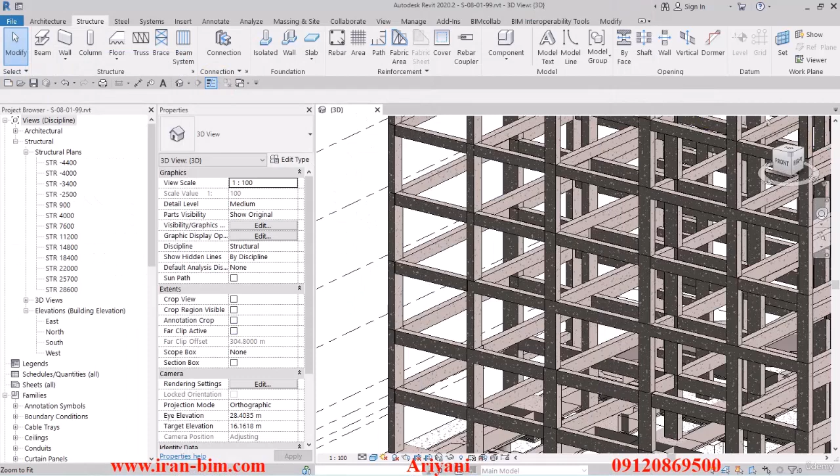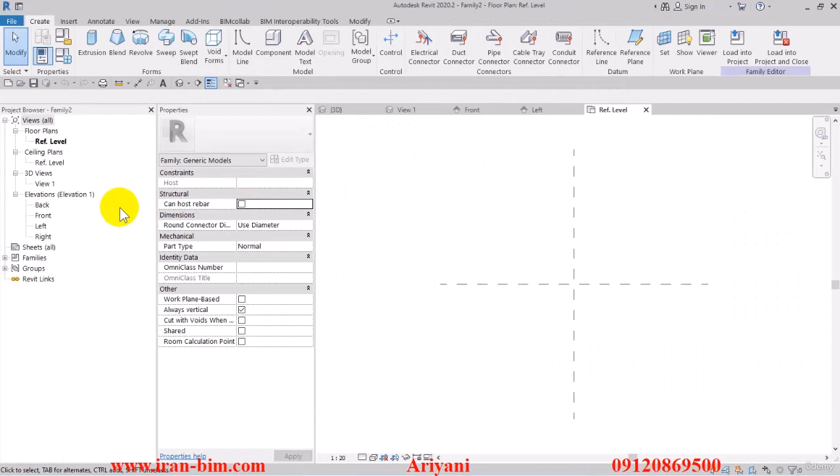Looking at the plans, I've created this profile here, and I'm going to copy it. Then in the Revit file, I'll select a new family, and load up the metric generic model from here. Then we go to the front view.

I'll type UN, and from this menu I'll put the units on meters. Let's have this on 1 decimal place, or you know what, 2 decimal places, and then OK.

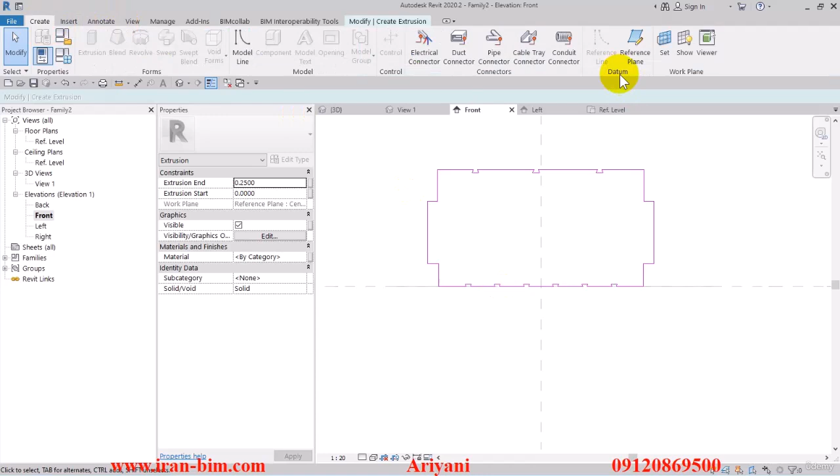After that, select the extrusion and click on import CAD and open this up. Then I'll select the reference plane tool and draw a reference plane here, then another one here, and the last one for its height.

Now I'll select these and equalize them, and this one as well. Then I'll select this up here and name it W. After that, select this one down here and name this one H for height.

Then let's go to the family types, change the H to 0.25 and W to 0.5. Then select the align tool.

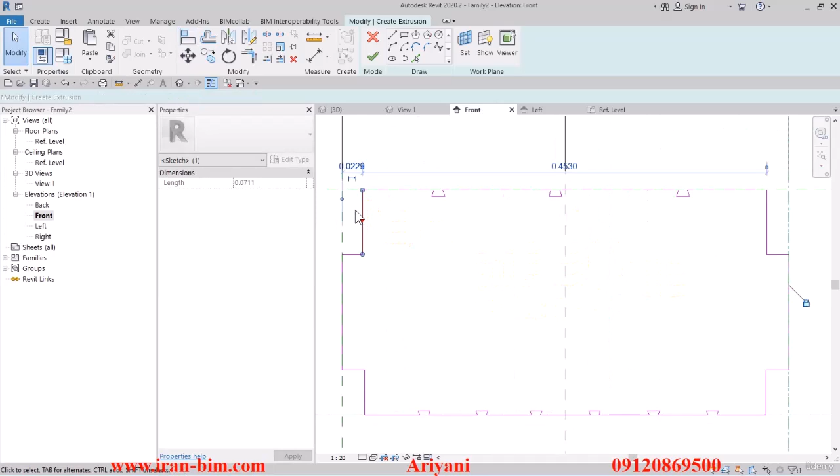I'll lock this with here, then equalize the two sides of this. So Control C here, and then we go over here and paste. Then select the line and lock this with this one.

Let's go back to the plan and finish this up. I'll select the reference plane and draw one here, and another one down here. After that, let's draw 2 vertical ones here.

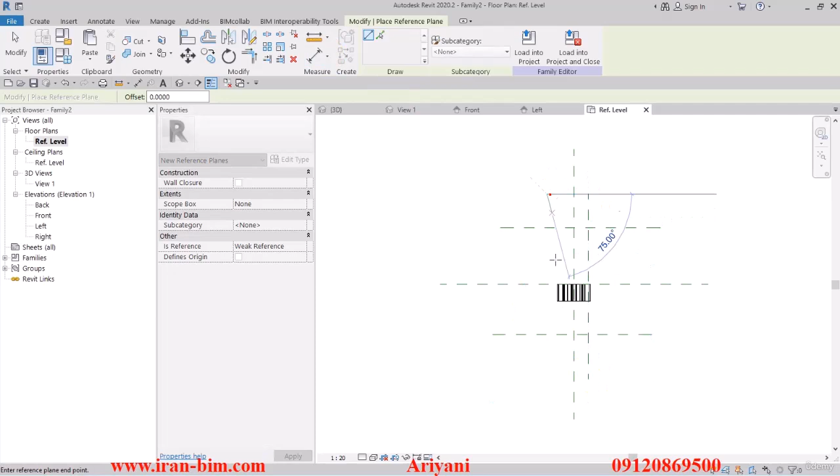After that, let's draw this on the side and equalize it. So this one's going to be our length, and this one is the W. I'm just drawing these in case we need to align them later on in the project.

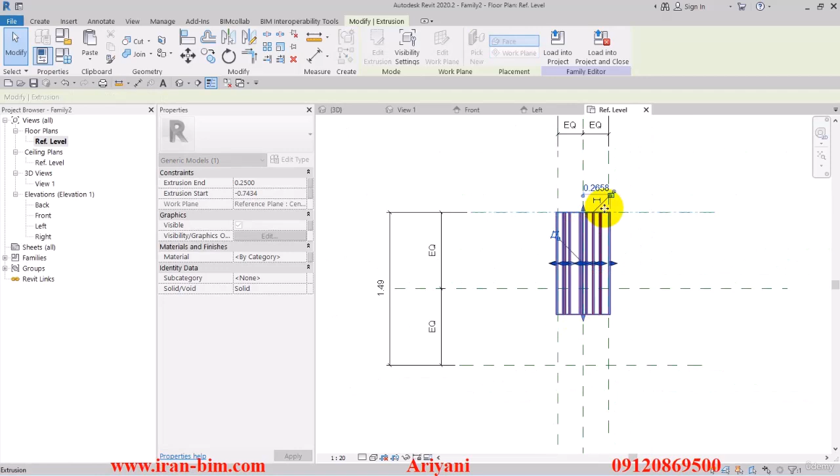After I'm done adjusting the W, I'll go here and select this, pull it up to here, then lock it, and then this, and lock it here as well. So we'll name this one length.

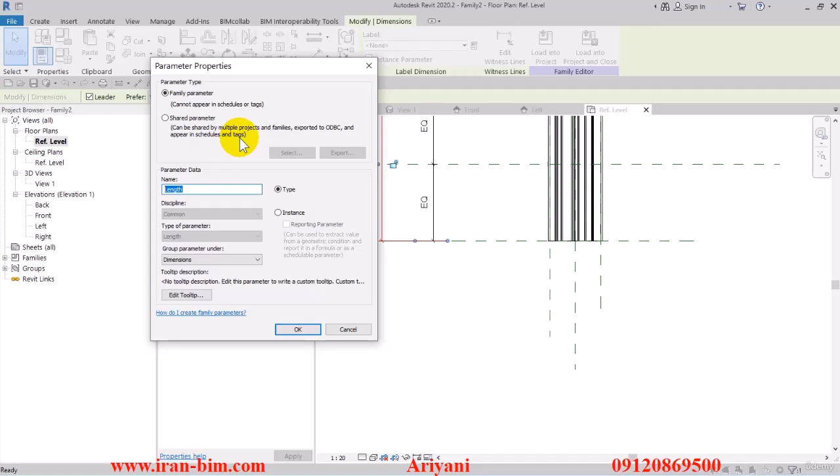The standard length that we're supposed to have here is 2 meters. But sometimes in the project, in order to smooth things out, we may need to adjust this one as well. So what we can do here is put this under the shared parameter, and later on, if you want to add in, let's say 20 centimeters, we won't have to split it up separately. We can just change this to 2.2.

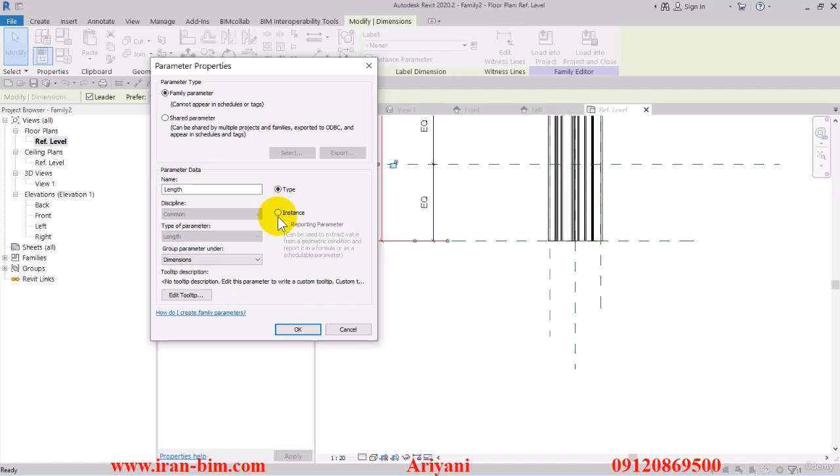Later on, we can divide the total length of these by 2 meters and get the number that we want. Or if you want to work the project patiently, you can just put this on the family parameter and edit it as you go on. This is all based on your preference.

So just put this on the instance and OK, and then put the length on 2 meters here. Then I'll select this here and give it a material parameter.

Let's see what we should name this one. We'll just go with polystyrene for now. Alright, and then OK, and OK here as well.

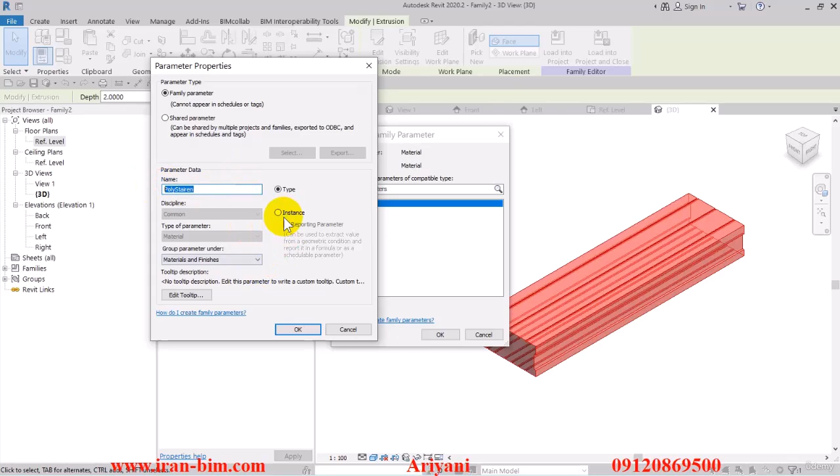Then I'll go to the family types and open up the material by category. And here in the browser, I'll look for polystyrene. Let me just edit it so I can see what I actually can find.

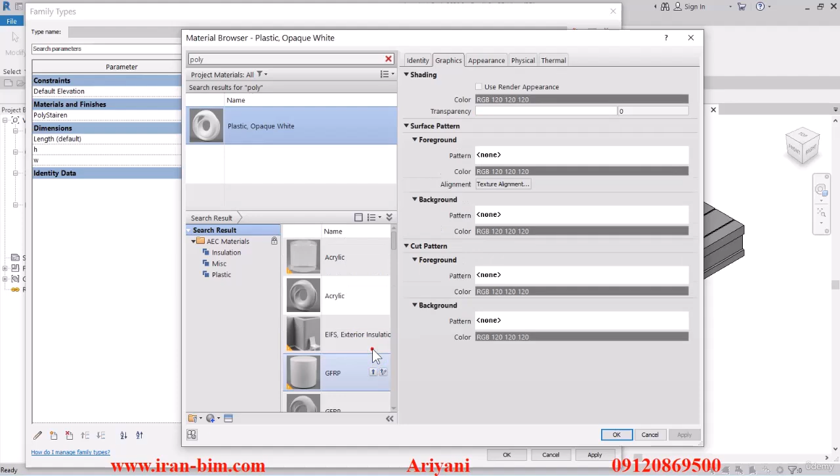From the menu, I'll look through these, select this one and add it up. Then check this box and apply and OK. And apply again. So now I'll save the file.

Back here, open up the families folder, and just name it polystyrene. Then put the maximum backups on 1 and save it.

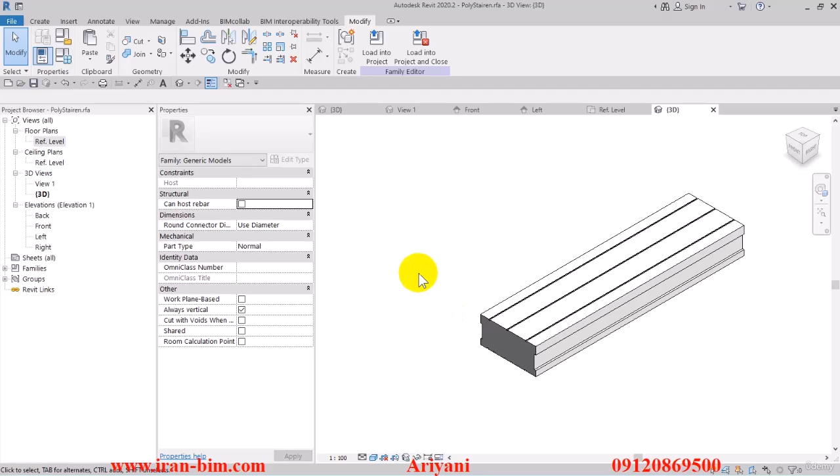Now if you want to repeat this process and multiply the number of the pieces that you have, you can load this up in a line-based setting like this here, and I expect you to know the process by now. Then you can repeat this piece in the file.

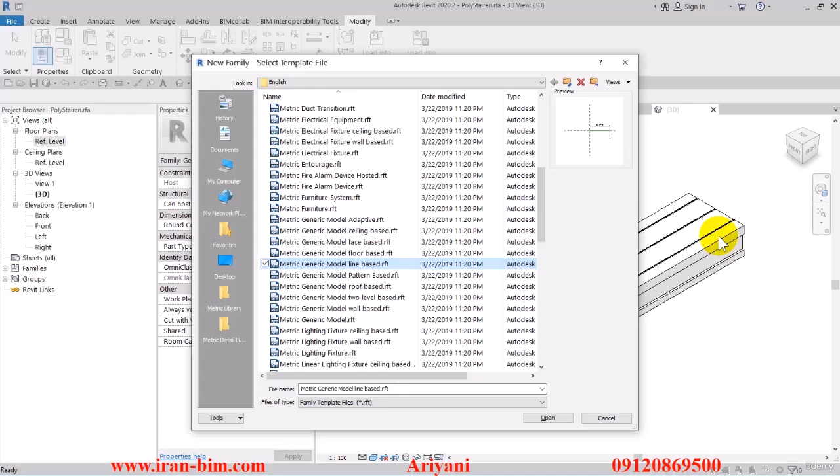For example, if the opening of this is 2 meters, you'll multiply the length along this. As I said, there may be some issues in the calculation. Some numbers may not add up and some spaces may not be filled.

So another technique that we have is selecting the joist that we already created and load it up in the structural framing file that we have here. For example, you can unload this here and then load up the joist that you've created and put 2 of them here.

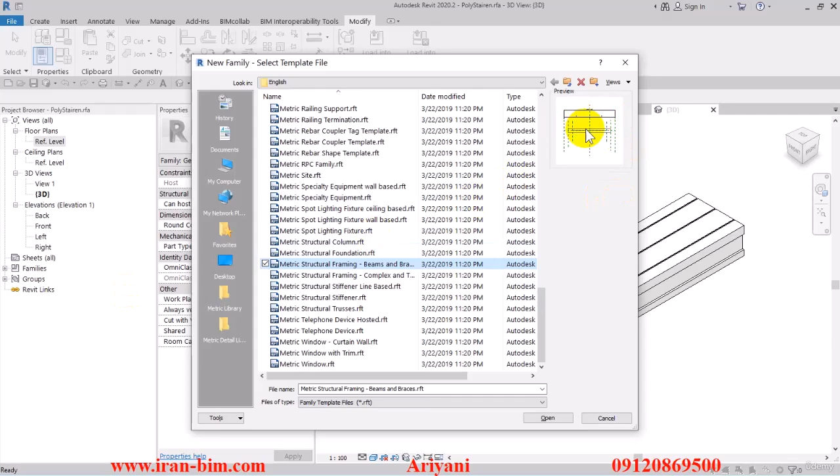Meaning after you've loaded up, you can set the length, specify the parameters, and then copy the opening of the unilith here, like the actual images that we have here.

Like this one right here, you can load up the joists first and then put the unilith according to the opening that we have here. And so this is going to be one family.

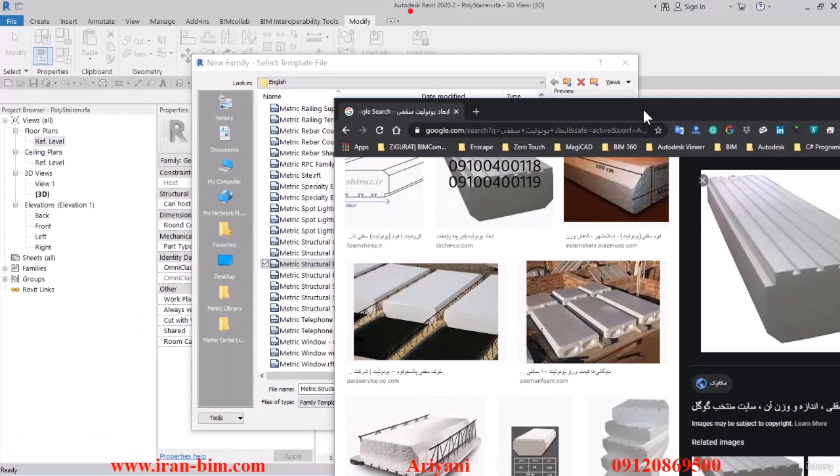If you want to calculate each one of these in the estimates, you can check the shared box here when you're loading up the family, and then load up each one of them separately. The upside to this is that it's just one piece and you'll model it all at once.

But then later on, we have the same length issue as before. For example, another issue you may come up against is that the plan doesn't have any joists on one side. We can assign each side of it the visible parameters and check them yes or no if you want to later on.

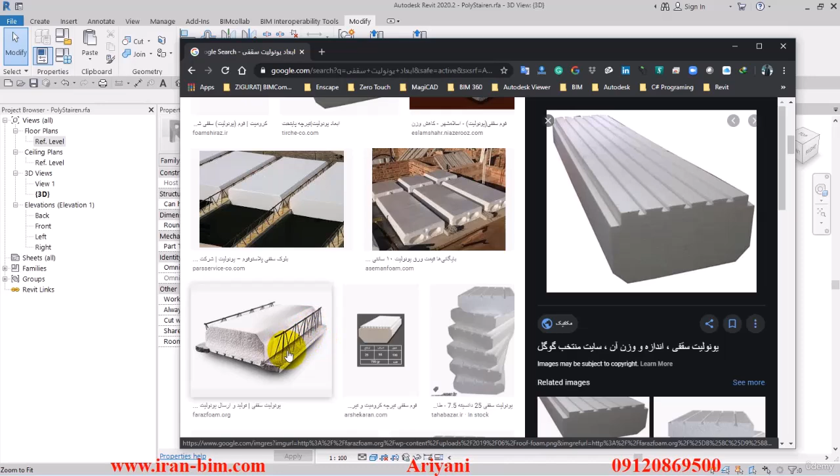You can also put them under the instance category, and later on if you want to, you can hide them or not. So you can use all of these techniques, but my suggestion is that you work each piece separately and use the array tool to place them. Using this method may take a bit longer, but the detailing and quality of your work will increase massively.

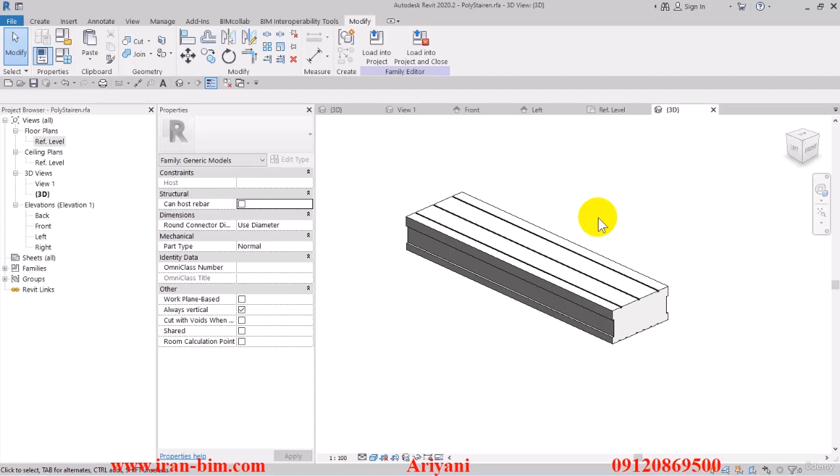The next point is when you have fewer parameters in your Revit file, because when you're using the line-based tool or the joist itself, you're going to have to add a couple of formulas and parameters as well. So the more parameters you have, the longer the processing of the project takes.

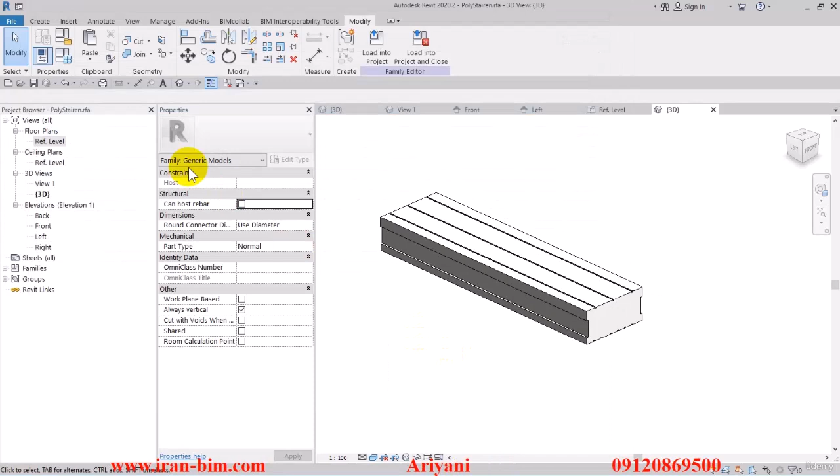But when you're working a simple project like this, you can process it much easier and have a much lighter file. So those are some of the important points that you should know. Now I'll just close the file here.